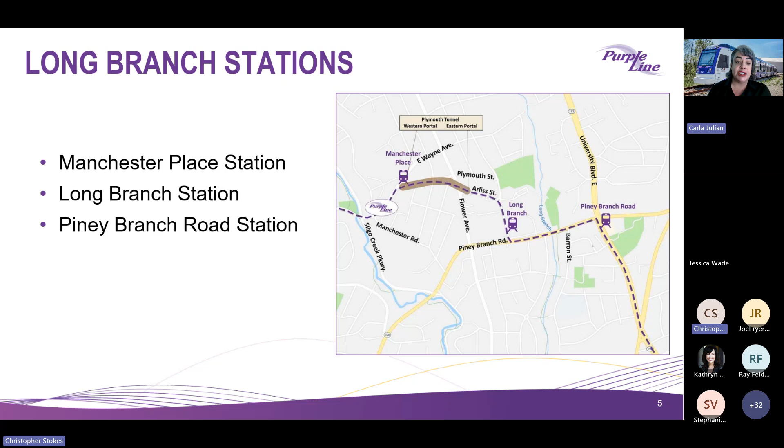Stations we're going to focus on tonight are Manchester Place Station, the Long Branch Station, and Piney Branch Road Station. And with that, I'm going to turn it over to Ray Biggs to introduce our fall progress video.

Thank you, Carla. We are so excited to have you all here tonight for our CAP meeting for the Long Branch area. We had much progress over the summer, especially in this area where we completed a lot of track installation. So I won't keep you any longer. Chris, if you want to go ahead and let's play the fall progress video.

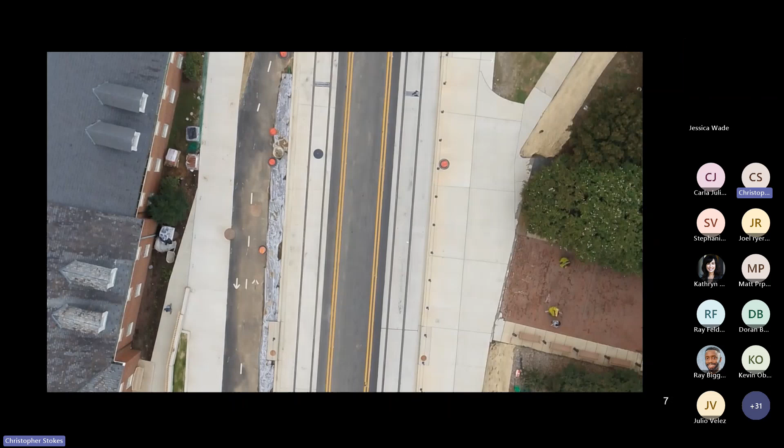Welcome to our Fall Progress Update video for 2024. We are here on Campus Drive at the University of Maryland, where we recently completed a lot of our summer construction work that completed the track installation all along Campus Drive. We are so excited that we have 5 light rail vehicles at our operations and maintenance facility, and we also completed 10 miles of track across the alignment. Did I also mention that we have over 17 miles of sidewalk that have been installed?

Additionally, you can see the colorful canopies right behind me, and we have 19 stations that will be in construction by the end of this year. We are so excited that we are moving forward, completing the momentum on the project, and continuing that going forward.

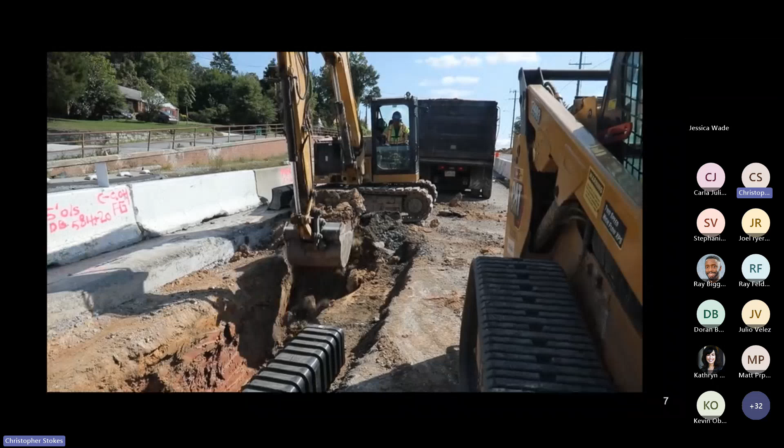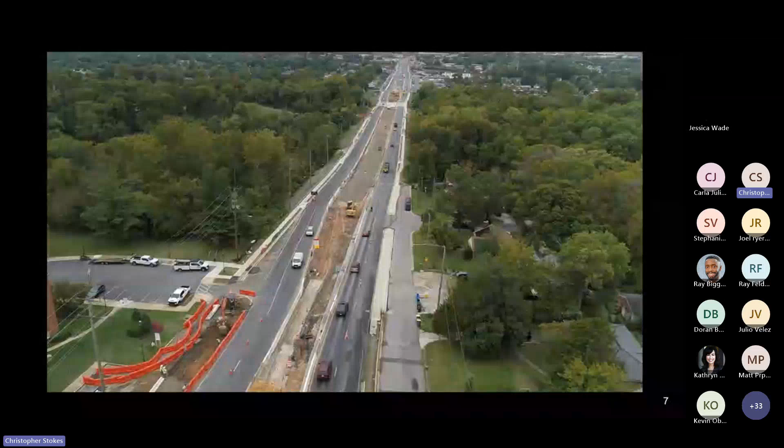Crews have focused on many specific areas to minimize impacts and advance the project. In Prince George's County, crews prepare for track placement by establishing work zones in the center of University Boulevard. Traffic is shifted to the newly completed sections on either side of the road.

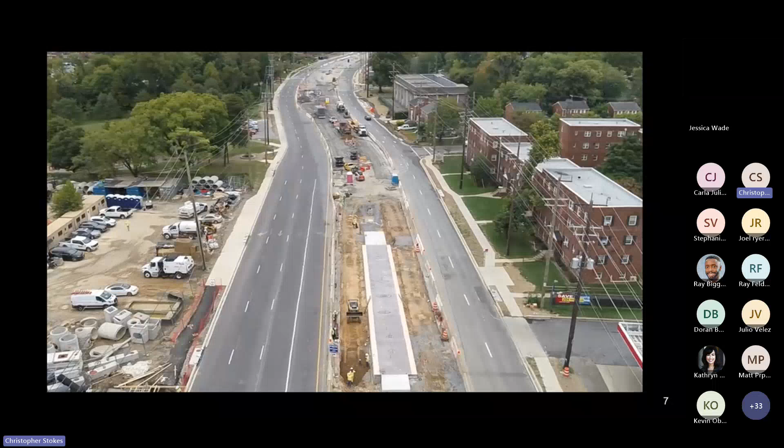At the University of Maryland, crews have successfully completed much of the heavy construction through the center of campus. This year, students arrived to find newly completed sidewalks, embedded tracks, paved roadways, and all lanes open on Campus Drive.

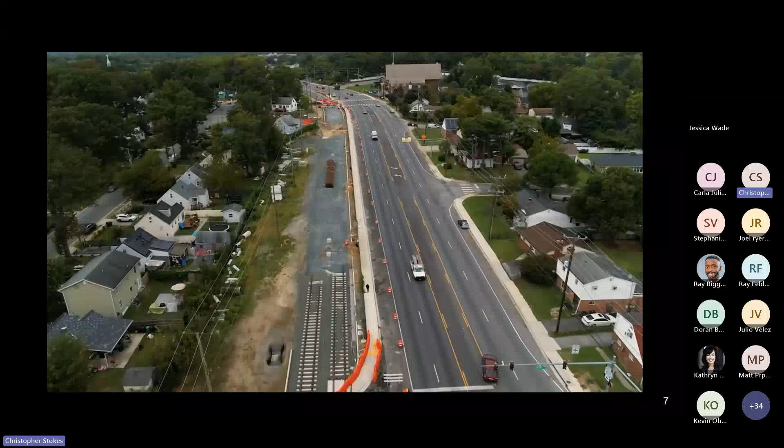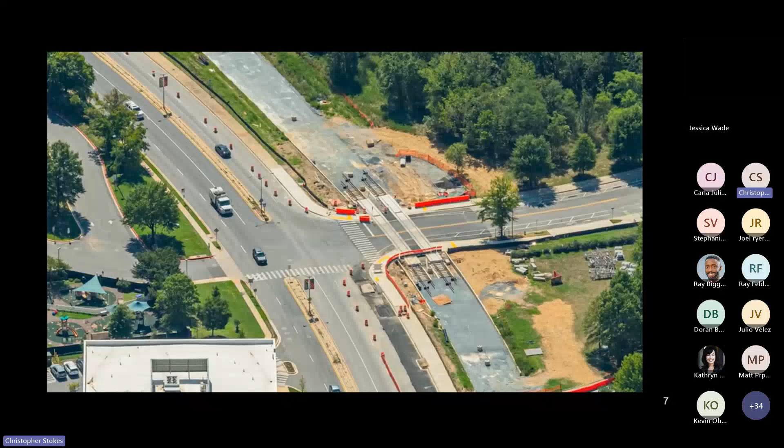Also in Prince George's County, crews opened 2 new roads, 64th Avenue and Mustang Drive. Both connect communities to Riverdale Road at signalized intersections. The flyover bridge from Kenilworth Avenue over East-West Highway has also been completed. Track crews completed the crossing of Rivertech Court and opened the road 3 weeks ahead of schedule.

At the operations and maintenance facility, the new light rail vehicles are being prepared for testing. I am honored and thrilled to stand here today at our operations and maintenance facility in front of this. Maryland, we have a train.

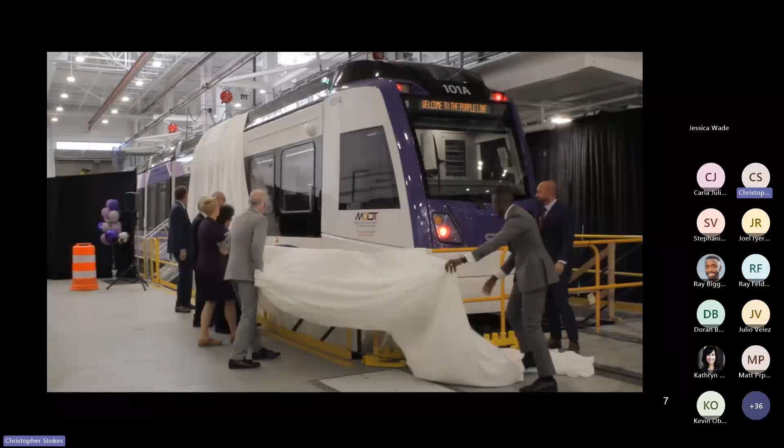Good morning. I'm Holly Arnold, administrator of the MTA, and I am so thrilled to be here today to celebrate the arrival of the first of the Purple Line light rail vehicles.

A huge congratulations to the Purple Line team. This team does not sleep. They are working all the time to deliver the Purple Line for Maryland, and I'm so thankful and grateful for them.

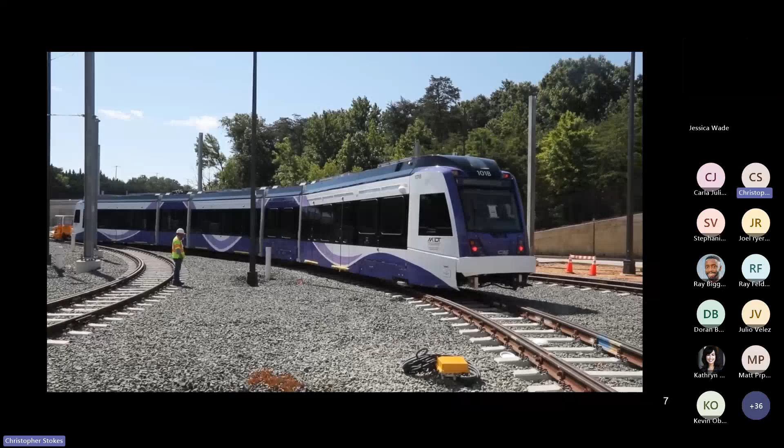These vehicles are 142 feet long, nearly half of a football field, almost twice the size of a metro vehicle, and will be the longest light rail in North America. It'll hold up to 430 passengers, with 8 bike racks on board, as well as 8 dedicated wheelchair spaces accessible near the doors.

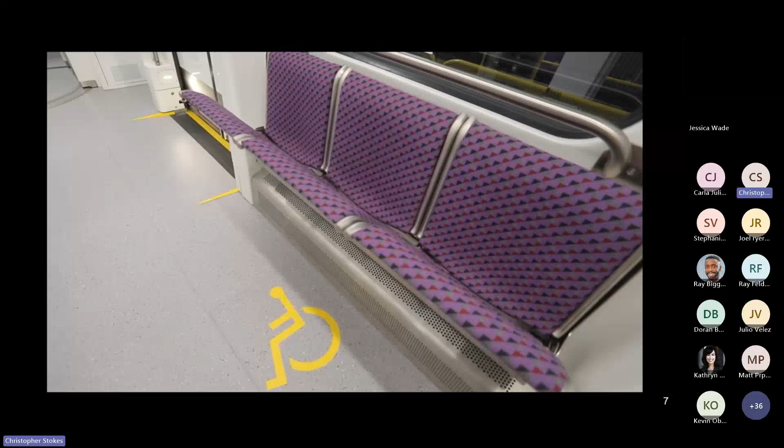These electric-powered LRVs will reduce energy and carbon emissions, as well as being quieter than other modes of transportation.

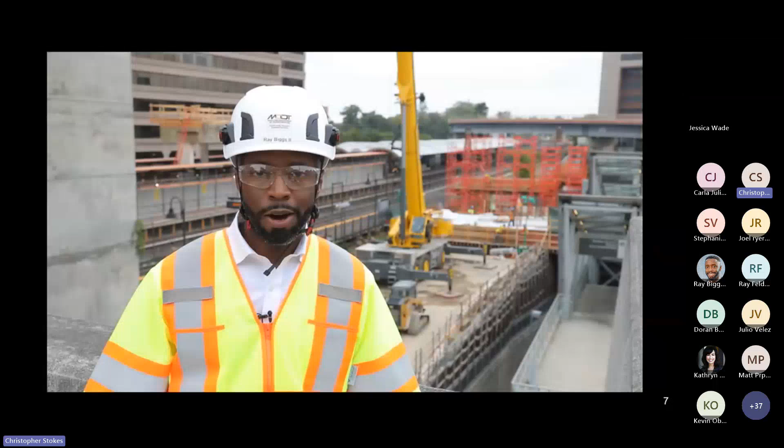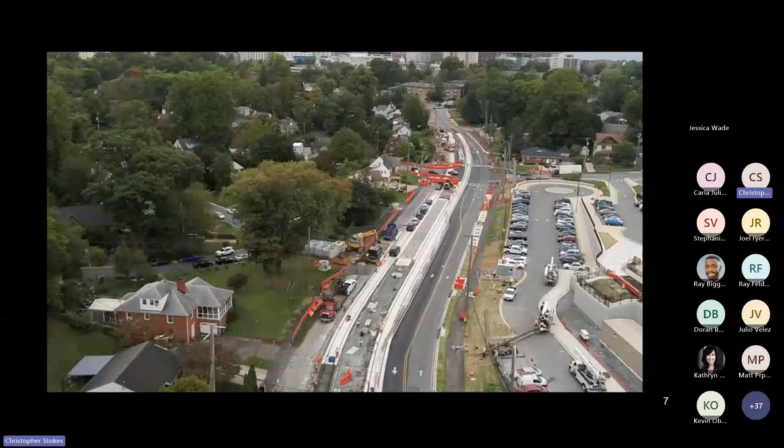Over the summer, we worked very closely with our partners at CSX, WMATA, Montgomery County Parks, and Montgomery County Schools to complete a lot of construction work and installing track all across the alignment. In Montgomery County, the Purple Line has successfully placed both sets of tracks across the Wayne Avenue and Dale Drive intersection prior to the start of the school year.

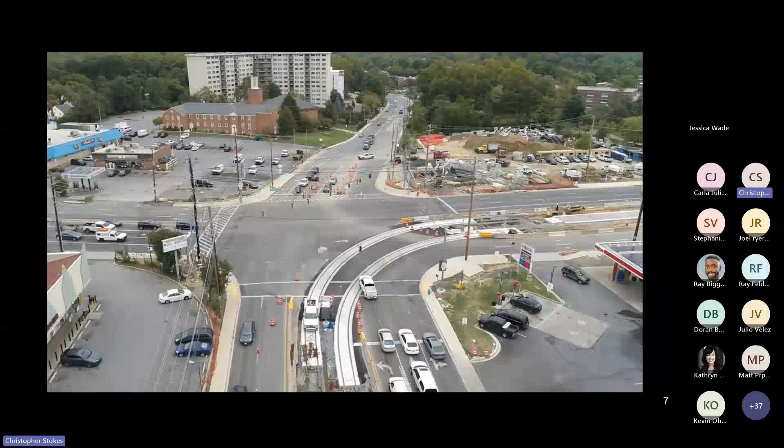They have also installed the complex curved track at Piney Branch Road and University Boulevard, and fully opened the Talbot Avenue Bridge.

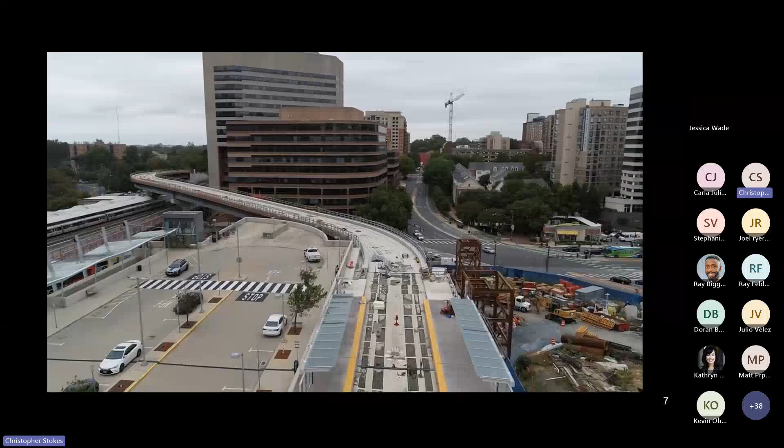At the Silver Spring Transit Center, the LRV bridge over Colesville Road and the foundations and superstructure for the new mezzanine are taking shape.

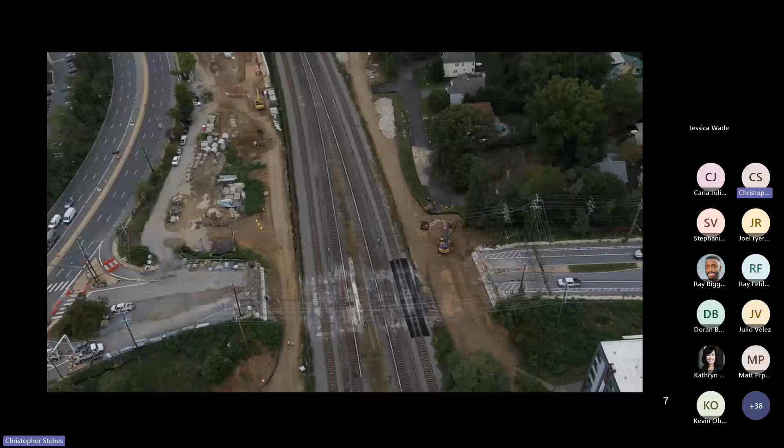Crews also started the work to build a new and improved Spring Street Bridge by completing the bridge demolition during the WMATA summer shutdown.

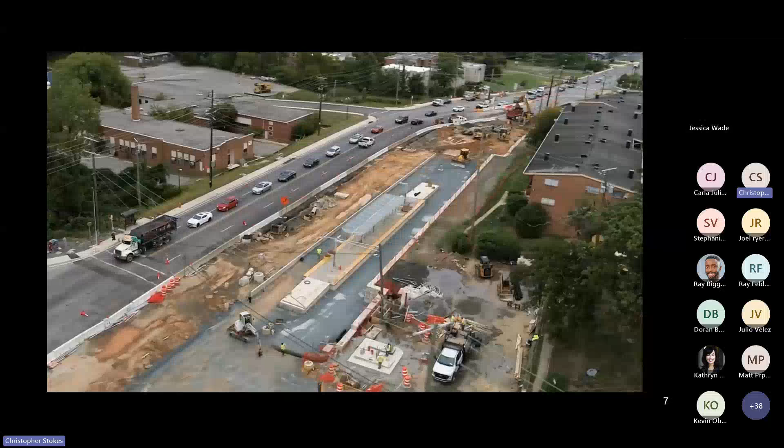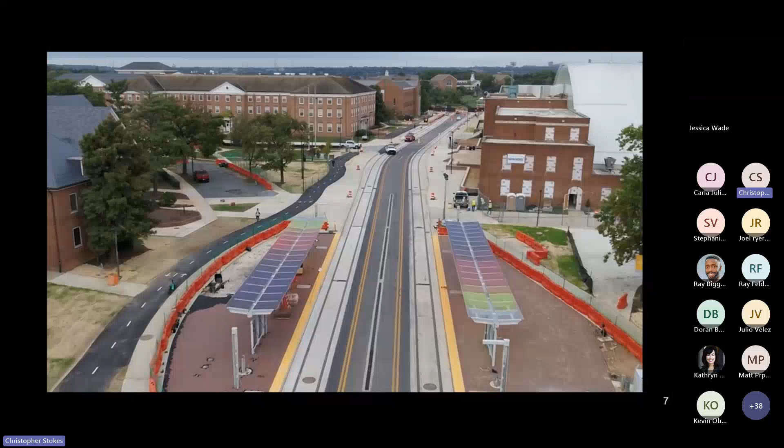Station construction can be seen across the whole alignment, with station after station taking shape. The highlight is the installation of the first Art in Transit artwork element at the Campus Drive UMD station. The artists at Legge Lewis Legge added a beautiful display of color that changes throughout the day and is a shining example of things to come at the Purple Line.

Thank you again for your patience, and while we continue construction, we are going to keep the momentum up across the alignment, moving from laying track into the testing phase of the light rail vehicles across the alignment. We are so excited about the Purple Line, and we know you are too. Thank you.

Here is our project timeline, and the next milestone, as I mentioned at the end of that video, is really moving into that testing phase where we will begin the static and dynamic testing of the light rail vehicles that have started to arrive here in Maryland from Elmira, New York.

We have 5 vehicles now at our operation and maintenance facility, as you can see in the bottom left corner there of your screen. And then moving from left to right, that second photo gives you a glimpse of what the overhead catenary system looks like along Veterans Parkway.

I invite you to take a ride out there to really see what the Purple Line will look like, and get a glimpse of that test track of where the light rail vehicles will be operating. The last 2 photos show all the work that we completed at University of Maryland over the summer, reopening Campus Drive back to the University of Maryland and allowing for that traffic movement.

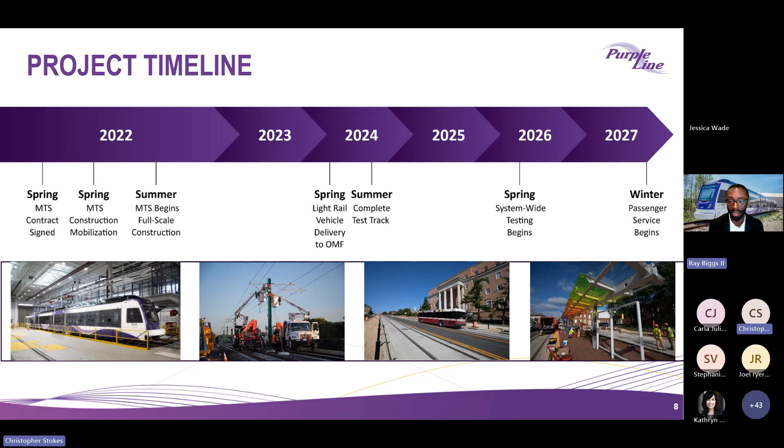So now we'll just jump right into the construction updates and some upcoming activities, and I'll pass it over to Julio.

I'll take this portion now, Ray, and then I'll hand it over to Julio to give a quick update on the work that's been going on in the Manchester Place Station.

So currently, we've been working inside of the portal. You can see here with the yellow waterproofing membrane on top of it. So we've recently completed all of the concrete placement for the portal.

And now that portal will be backfilled. So we will continue building the retaining walls around it, and we'll also continue building all of the storm drain system that goes around this structure. So there'll be a lot of work happening around the portal and also inside of the station.

We are working on the station outfitting. So with that, you will also soon see track being installed across the alignment in front of the portal in trying to get ready. Right now we've been completing all our utility work, and you'll see here starting the work on completing the retaining walls. Next slide, please.

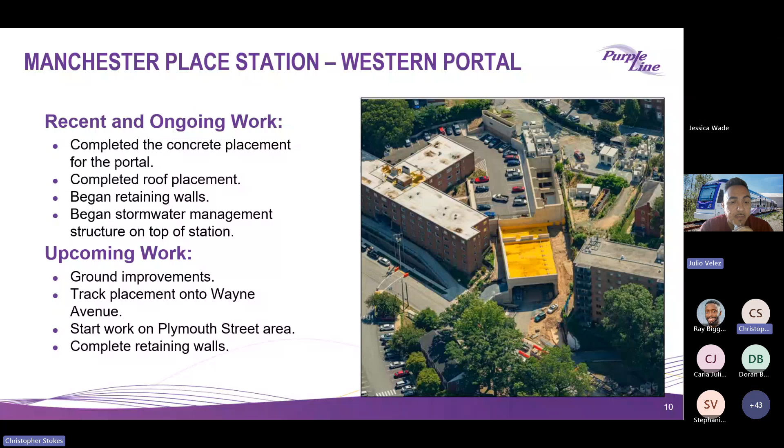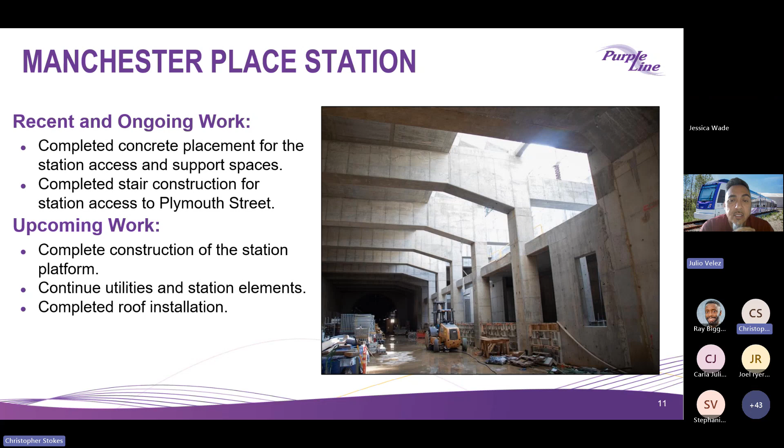Inside of the station, we've been working hard getting all the station outfitted. You can see photos from the inside of all the concrete placements on the station access, and also being able to work on the station platform. Those efforts will continue from now basically through next summer, trying to get the station completely built out with all the utilities and station elements, including the roof installation over the Manchester station.

Inside of the tunnel, we've been working on outfitting the entire tunnel with all the utilities required to run the train system. You can see photos here of all the electrical systems. We've also started installation of rail, one of the rails has been installed, and we will continue that rail installation progress over the next several months. Once the rail is installed, we will then continue installing the ventilation system and all the systems required to operate the train system in the tunnel.

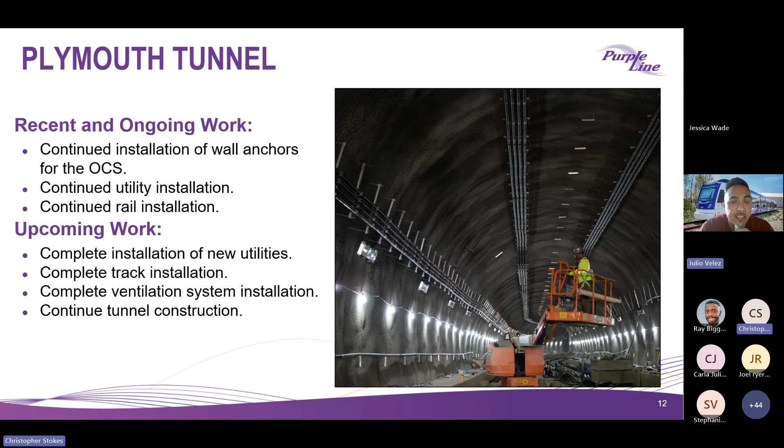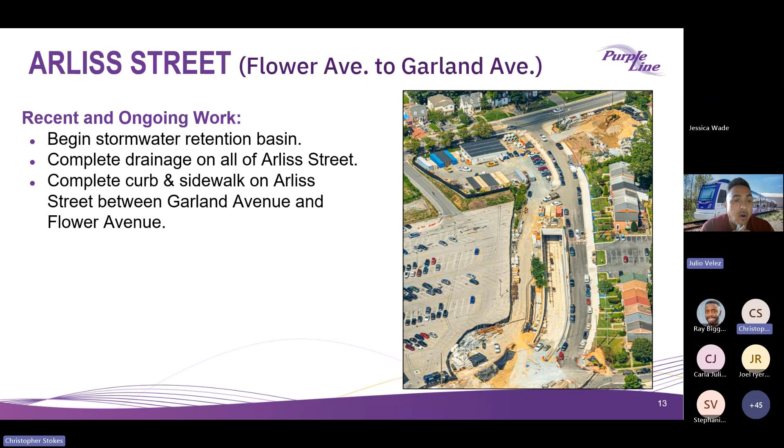As soon as you exit the tunnel portal, which you can see in the photo on your right-hand side, we will begin the stormwater retention basin work, which you can see on the top of the photo. That will not get slated until late next summer, but that is an up-and-coming activity. We have completed the drainage on Arliss, and we will be starting to complete all the curb and sidewalks along Arliss between Garland and Flower Avenue.

This is a photo of Arliss Street. We have begun doing work outside of the Flower Branch apartments and also within the Flower Branch apartments, installing a sand filter. That sand filter work is nearing completion, should be done between now and the end of the year. We've also begun installing track. As you can see, the curved section of track onto Arliss has been constructed, and those efforts of building track will continue towards the tunnel for the next several months.

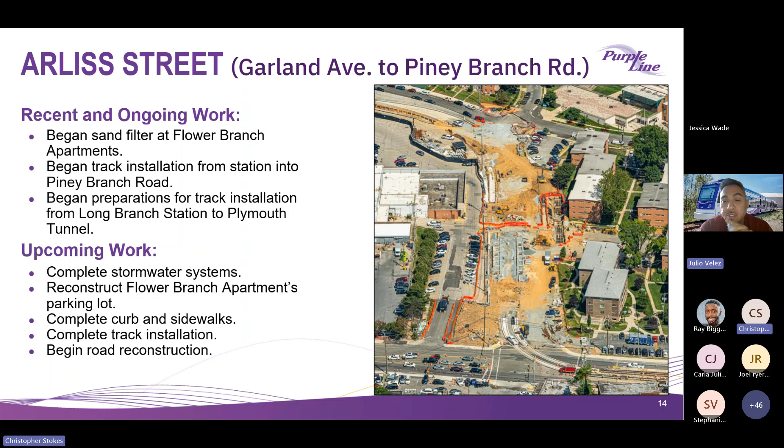Also up and coming, finalizing the reconstruction of Flower Branch Apartments parking lot, which is in progress and slated to continue through the end of the year. That will pave the way to complete all the permanent curbs and sidewalks as the track is being completed. Then come the new year, we'll get preparatory works started for beginning the new road construction on Arliss.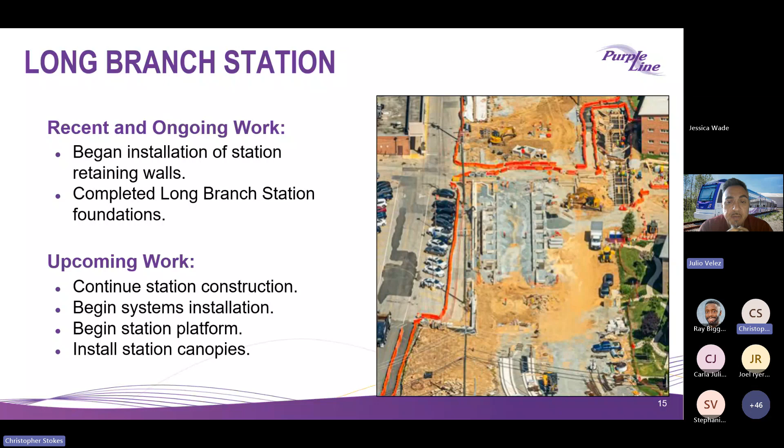As you make your run up to Piney, I'm going to turn it over to Iago so that he can explain all the work that's been happening on Piney Branch. Hello, good evening, thank you Julio. Good evening everyone.

As Julio said, last spring we have been able to complete the track at the intersection between Arliss and Piney Branch, that curve section over there. At the same time, we have been able to complete all the stormwater systems and all the curb and new sidewalks on both sides of Piney Branch. This allows us to start, or continue, the installation of the track. We are moving all the way north from Arliss to University Boulevard. At the same time, we started the entrance to the Long Branch Community Center, and we have also been able to complete all the duct bank and all the OCS foundations in this area.

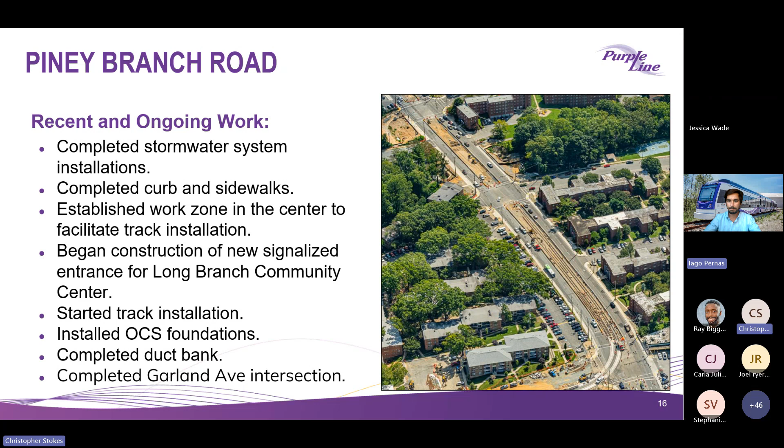More recently, almost a week and a half ago, we have also been able to complete the Garland Avenue intersection, and this intersection is right now open to traffic. In this picture you can see the progress - the track being installed from Arliss all the way up to University Boulevard, and this is pretty much the work we're going to be doing for the next weeks and months.

Right now, we have closed the intersection between Barron and Piney Branch. We are installing the track over there, and the plan is to have that intersection fully open by early November. At the same time, we would like to complete the new entrance to the Long Branch Community Center and also complete the stream restoration of Long Branch.

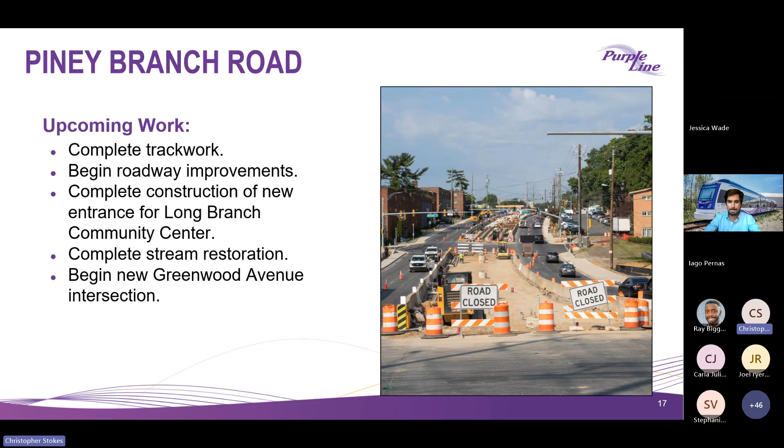As for MOT phases or big traffic changes, as mentioned before, on October 1st we reopened Garland Avenue and we closed Barron Street. This means that for a month we are not allowing the left movements coming from Barron to Piney Branch southbound.

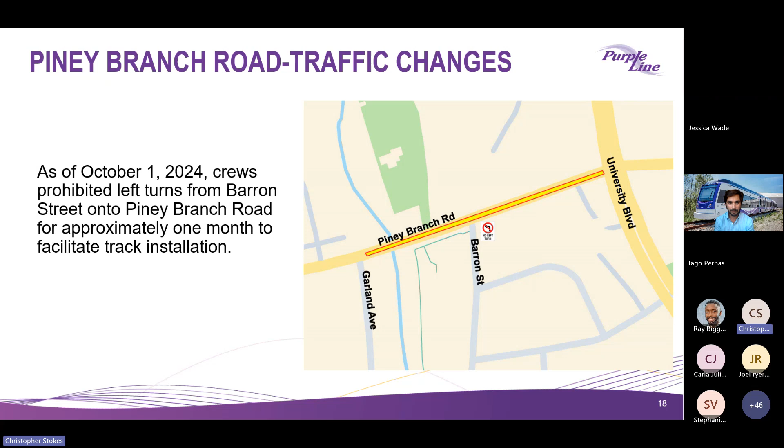Thank you, Iago. Okay. Yeah.

Good evening, everyone. My name is Surren Sirkisoon, Systems Manager. I want to spend a few minutes talking about a very exciting milestone on our project, the test track.

The test track is located parallel to Highway 410 between Annapolis Road and Riverdale Road. It's about a mile long, and it's adjacent to our main operations and maintenance facility at Glenridge.

The test track will be utilized for dynamic or running tests of the light rail vehicles, focusing on proof of design and proving out that the systems and interfaces are functional and safe.

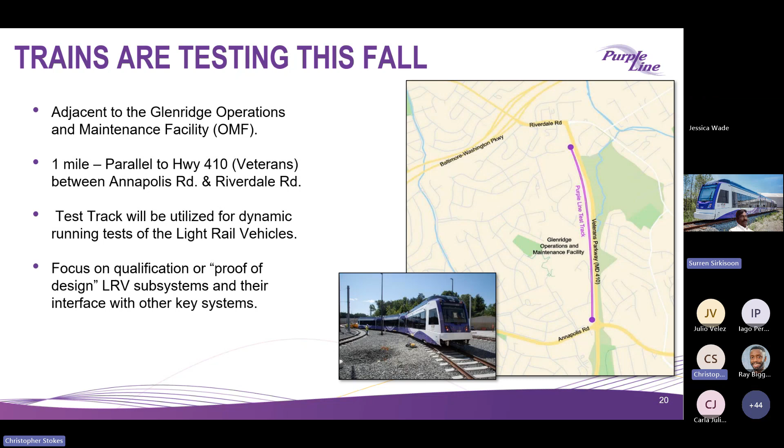Getting more into the purpose of the test track, you can see on your screen the tracks and the overhead catenary system, and all of the systems under the test track that no one really gets to see. The trains are in the facility here that I'm pointing with my cursor.

We'll start off with some of the more basic tests on the test track, braking and propulsion of the trains. Then we'll move into some of the safety systems, the automatic vehicle location systems.

There are going to be antennas mounted on these poles and connected to the control center, which is actually housed in the OCC, in the O&M facility at Glenridge. So we'll be able to track exact locations of where the trains are at any given time.

We also have passenger safety systems on the trains that we'll eventually be testing on this test track, like the passenger emergency intercom, so that if passengers are in distress or there's some sort of event or emergency, they can communicate with the train operator and with the control center.

The test track will also serve as a training ground for our LRV operators. Many of our operators have already been trained, and they'll continue their training on the test track. We've also trained our first responders in the area, police and fire departments, so we're very well equipped to get into operation with the test track.

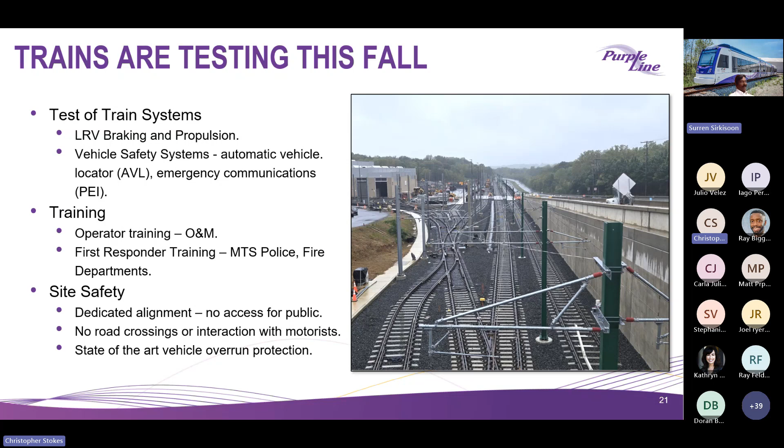Safety, of course, is first and foremost for utilization of our test track. As I mentioned earlier, we are stopping short of Annapolis as well as Riverdale, so there are no road crossings, and we will be employing a state-of-the-art overrun protection system to ensure that our trains stop short of fouling the test track.

As for status, as Ray mentioned earlier, we have 5 LRVs delivered and in the OMF facility. We've been conducting static tests of these trains to prove out their functions and safety features without running them on the test track. This level of testing is already completed.

And of course, we've got more trains coming later this year. The tracks, as you saw earlier from the first slide, have been fully built and tamped. The inspection and testing process is in place. We've got to fully test the test track before we can use it to test the trains, and that's the phase we're in right now.

The traction power substation that feeds the overhead catenary to power the trains on the test track is complete and fully tested. We are working on completing the cable runs from the traction power substation to the overhead catenary system, which has been fully built out, as you saw in the picture earlier, and we are also in the phase of testing that system to get it ready for use on the test track.

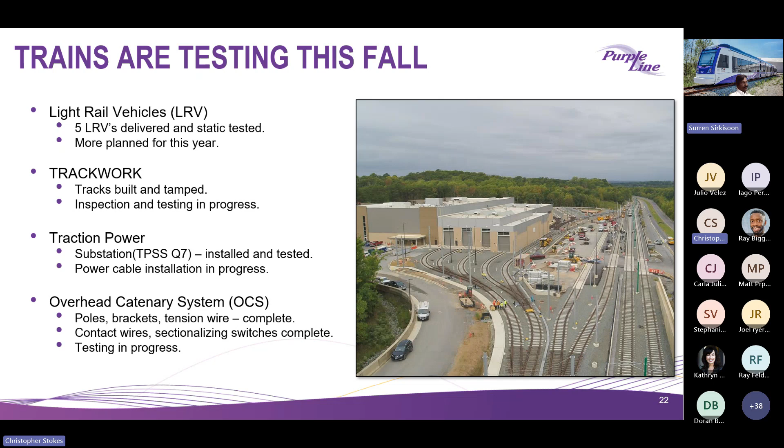Safety first. The test track was strategically located in a dedicated section of the alignment, also located just alongside the maintenance facility. Safety is always first and foremost in everything we do on a project, including testing of trains. Things to note for the general public: there is no public access to the test track. Obviously the trains in use are not for passenger use. They're solely for testing of the systems on the track as well as on the train.

We are working with our train control provider to implement a state-of-the-art overrun protection system so that the trains will remain in proximity of the test track, and there is minimal chance of fouling into the intersections or anything beyond the track on the west side.

Essentially, the test track is a culmination of years of pre-testing of many of the systems we're going to be employing on the project. It's where things come together and where we get to see how the trains react with all the systems interfaced with them. That is it for my short description of the test track.

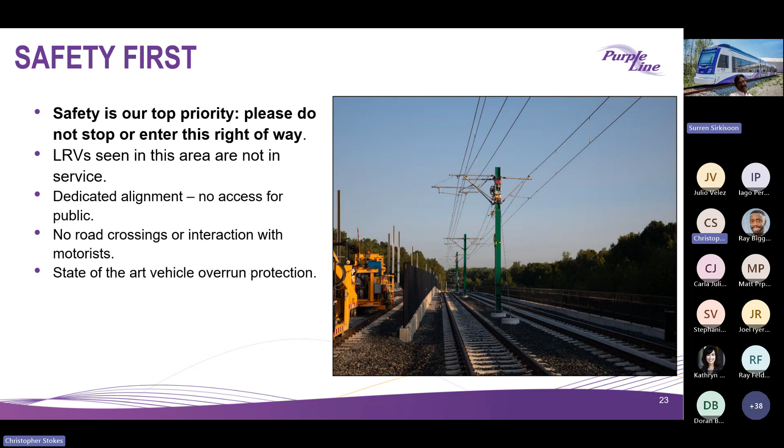I'm going to pass it back to Carla to go over some community engagement items. Thanks, Surren. Next slide.

So our team is out in the community. You can find us at places like the Long Branch Festival and the Crossroads Farmers Market. I think I saw Omar on. Nice to see you, Omar. We do enjoy being out there and getting questions from you guys and supporting the community where we have so many construction impacts.

You can always reach us at outreach@purplelinemd.com, as well as the English and Spanish hotline. So we do encourage you to reach out with those questions.

I'll turn it over to Doran to speak on bike, scooter, and skateboard safety. Thanks, Carla. You heard a lot of safety from Surren earlier about our test track and our LRVs, but of course we want everyone traveling in and around the Purple Line tracks to be safe, which is why I'm here to deliver a little message on bike, scooter, and skateboard safety.

Those with smaller, thinner wheels have to be careful when crossing the tracks as we put more and more tracks in the Long Branch area and throughout the alignment. Please be cognizant that the best way to cross is perpendicular to the tracks so you don't accidentally get a wheel caught in. Please use the crosswalks and cross at a right angle.

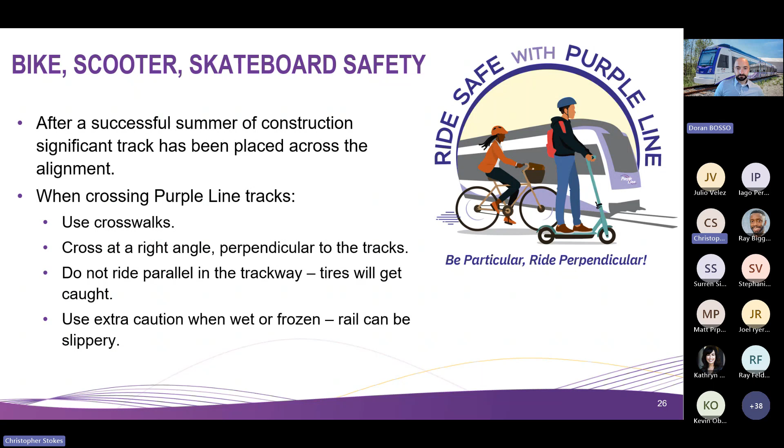For larger vehicles as well, like cars and trucks, as we get some wintry weather, please be extra careful around those rails as they can get slick. If we could go to the next slide.

I'm always happy to join and talk about something that is really so fulfilling for the Purple Line team, and that's the Beyond the Rails Community Grants program, where we award additional funds to nonprofit groups along the alignment doing great work every day.

So we're putting out the call now for the next round of 6 grants that we'll be awarding. The deadline for applications is November 30th, so you still have another month and a half to get an application in by visiting our website. It's a pretty short application process.

If you have any questions, need help applying, or questions about whether you qualify, you can email grants@purplelinepartners.com. More information is on the website, which Ray will talk about shortly. So we can go to the next slide, and I'll hand it over.

All right, thank you, Doran. It's always great to see all those grants given out to the community. One thing we wanted to emphasize tonight is the Purple Line website. Over the summer, if you missed it, we did a refresh of the website.